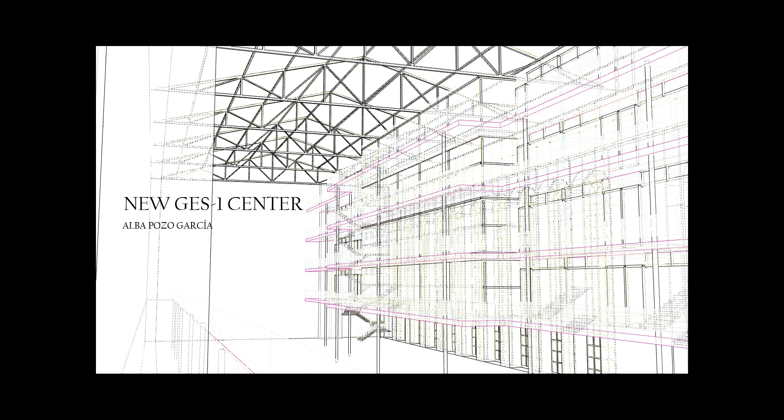Society on several occasions has excluded the elderly, a social group that suffers the risk of being left alone and isolated, without social events or spaces to satisfy their needs, being reduced to the interior of the house.

This situation has been aggravated by COVID, when many Russian elderly have been isolated and confined inside their homes without relating, in addition to the impossibility of carrying out their routines in their homes and having their basic needs covered. The project arises as a response to this prevailing need of recent times, a residential and therapeutic space and

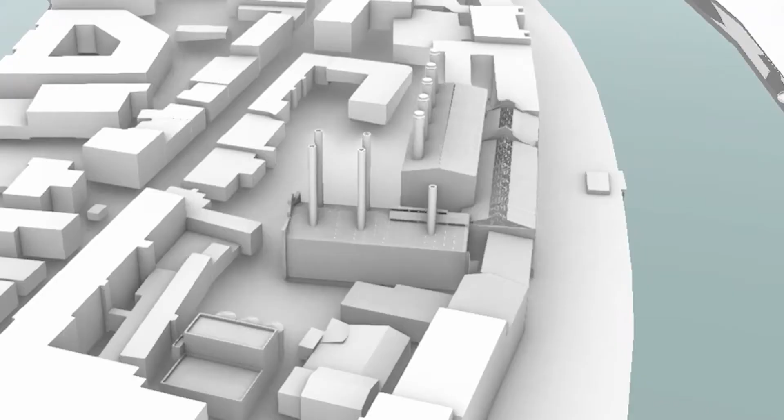coexistence for the elderly population, seeking the relationship between different users and generations due to the benefits that this can bring to the resident. The project is implanted in the current GES-1, a space with an industrial character dedicated until now to a power station and in a privileged position in the historic center of the city of Moscow.

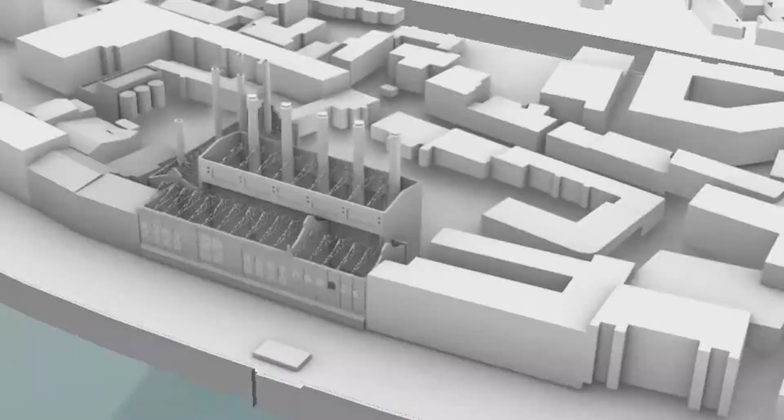The implementation of the intergenerational center in GES-1 humanized the industrial space, generating programmatic islands from the encapsulation of the program, all connected and articulated by the public space. And on the other hand, Hundertwasser's five skins theory is applied. This has already been used for the characterization of the pre-existing factory and later for each of the parts of the program that are introduced.

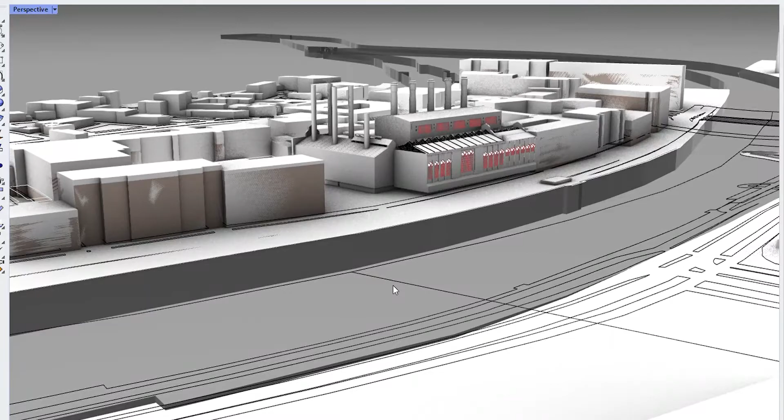This theory represents the identity of a person or space based on 5 layers of information: epidermis, clothes, house, identity, and land. The new GES-1 Center is located on the north volume and on the cross-section of the pre-existence. General volumetry is conceived as a twin between the existing GES and the extension, seeking to maintain the industrial character and unity in the entire volume.

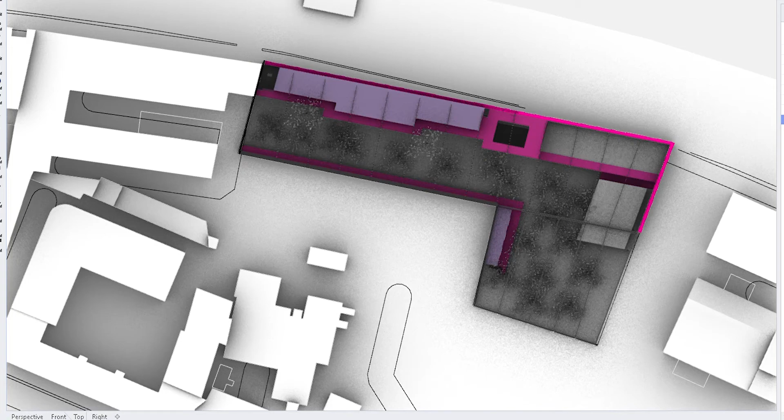The entrance to the center is through the south face, accessing a garden greenhouse, being the articulating element of the space and the meeting point of the users and an acclimatized public space for the environment. The interior is organized through the covered garden. On its margins, the programmatic capsules appear, with secondary access to the different spaces.

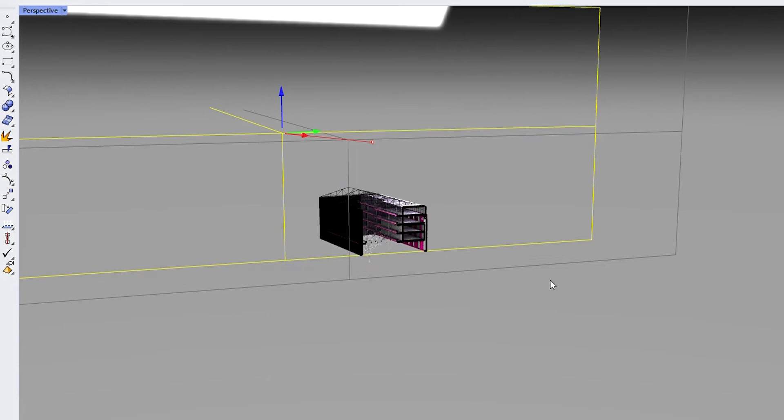The capsules are stacked in height, seeking to free up the greatest amount of floor space. These capsules are interconnected by light walkways that maintain a constant connection with the garden and which are accessible by a central staircase of great presence.

The program generates a public-private gradient and consists of a residential area, a recreational space, a therapeutic area, and a professional area. The residential spaces are placed in the farthest area from the access. On the other hand, the space for professionals and the therapeutic area are placed in the closest, since it's used for internal and external users.

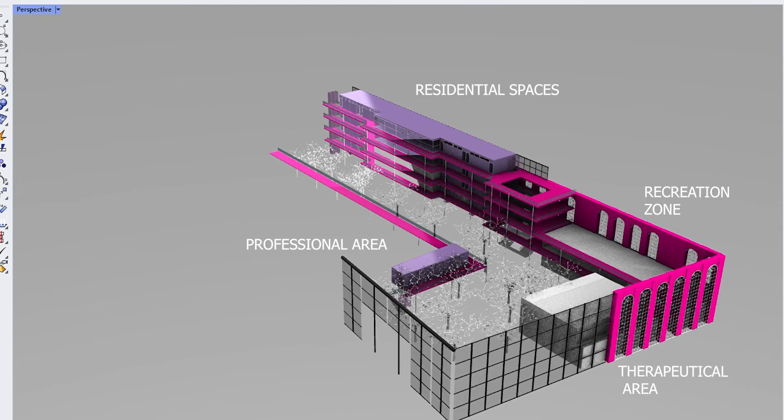The residential space is generated through housing units of 8 to 12 people, with individual rest cells, views toward the city of Moscow, and access through the walkways, located around the shared common spaces, thus generating the housing cell.

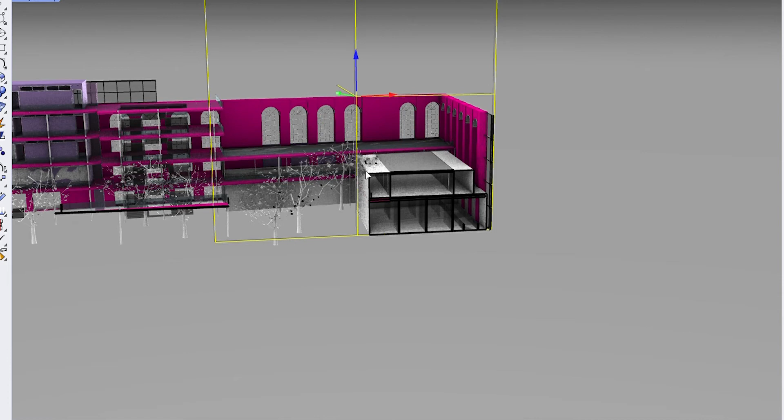The recreation space contains a restaurant and a multipurpose area on the first floor, relating to the therapeutic space, with independent access for external users. Also, on the first floor are located the consultation rooms. On the ground floor are located the Russian baths with sauna and swimming pool.

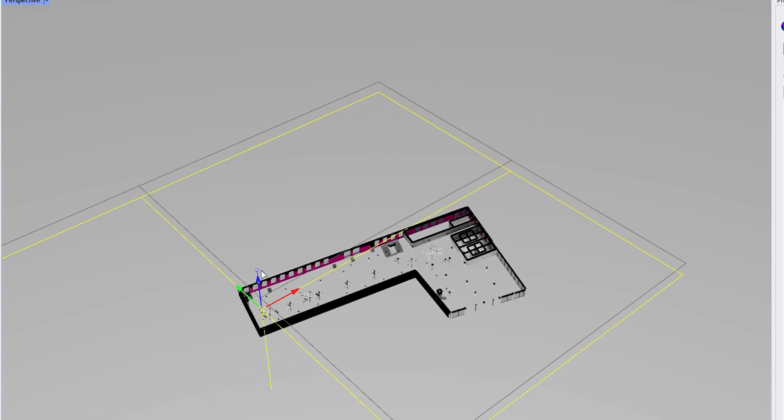The architecture of the capsules is resolved by means of a metallic structure and polycarbonate enclosure, with the exception of the common spaces of the housing cells where the prototype is implanted, an intelligent glass that regulates the level of privacy. The space maintains the existing facade in the north volume and modifies its roof, generating a crystalline gabled enclosure. The extension is solved with the same section, but simulating a greenhouse with a metal and glass structure.